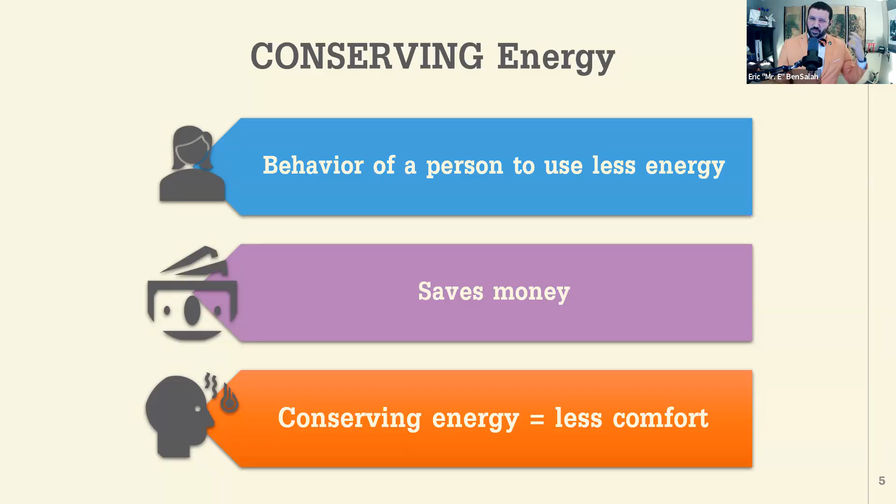For an example, and yes, this is my dog Waffles. I use my dogs when I teach a lot to help explain things, but Waffles is exhibiting an energy conservation behavior here. She's wearing a sweater instead of having the heat turned up by the thermostat. So yes, the air around her has not necessarily gotten warmer, but her radiating heat from her body has reduced because now she's warmed up. I think we all kind of know about the whole dressing up warm instead of turning the heat up, but that is a conservation behavior.

Turning off the lights when not in use or not in the room, turning off the water while brushing your teeth, taking a cold shower. All these things are behaviors that we do to reduce our energy usage.

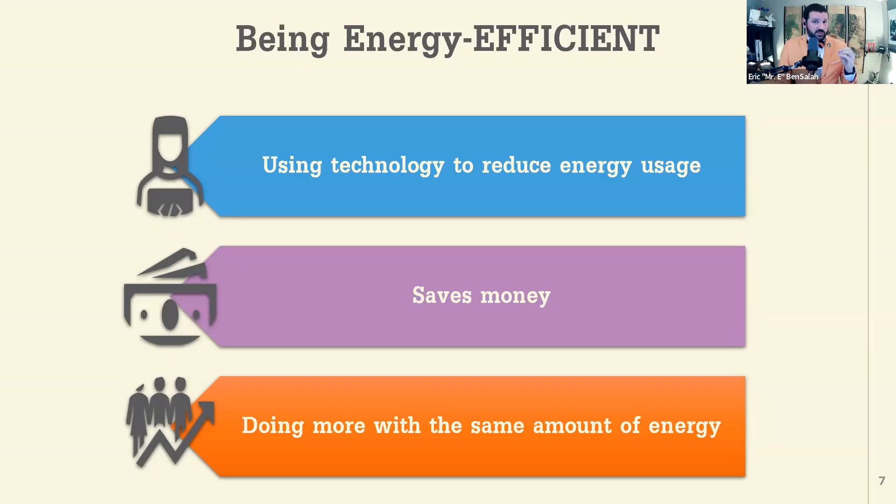On the other side of this, being energy efficient is when we are using a technology to reduce our energy usage. So we ask for some help from a technological standpoint. Again, we're reducing our energy usage, so we reduce the amount of money we have to pay. But because we're using a technology and being more efficient in terms of energy transfer, we can still do more with the same amount of energy.

The best example of this is LED light bulbs. I think we all understand them at this point, but LED light bulbs are a wonderful example of, first of all, light bulbs have to convert electrical energy to radiant energy. LEDs convert 90 to 95% of the electrical energy into radiant energy. Those old incandescent light bulbs only convert 10% into radiant energy. The rest of it is heat, which I don't think we buy light bulbs to heat our houses, but that is an example of energy efficient technology.

Smart technology like smart bulbs, plugs, outlets, power strips, even a smart thermostat or a programmable thermostat, those are all energy efficient ways to reduce our energy usage. And they don't always have to be technologically advanced. A low flow shower head is also an energy efficient technology to reduce the flow of water, which would also reduce how much water you're wasting, as well as how much water you have to heat to take a shower.

One last one I didn't have here as an example, but it's one I tell students about a lot: if you have an attached garage in adverse weather conditions, whether it's really cold or really hot, leaving your home through the garage is actually the most energy efficient way to do so.

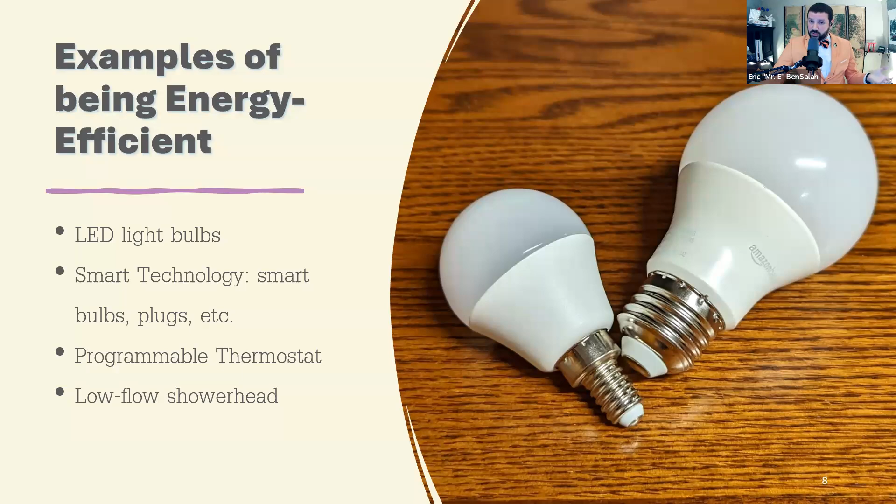Of course, I don't think you have to necessarily be one way or the other, but we can be energy conscious. My house is full of LED light bulbs and smart technology, but we still turn off things if we don't need them. No need to waste the energy. Smart technology can kind of help us reduce unnecessary energy usage as well. Especially if you leave the house and forget to turn something off, you have the ability to do so from anywhere pretty much in the country.

So what I like to think about when it comes to energy efficiency and conservation is thinking about the science behind all of it. I'm going to take you back real quick to sixth grade science class about the three methods of heat transfer. And I promise there's a point to this: conduction, convection, and radiation.

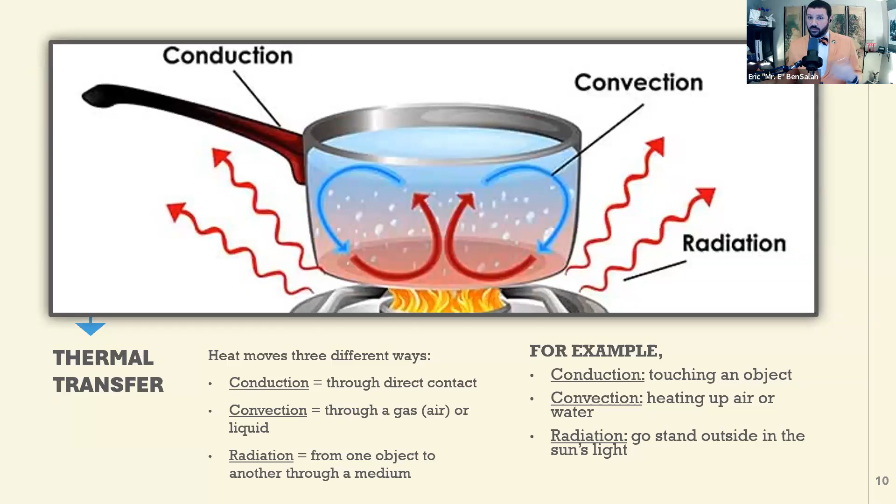Conduction, heat transfer or thermal transfer through direct contact. Convection through gas or a liquid. And radiation from one object to another through a medium. I bring this up because when we're looking at trying to stay comfortable, especially in the wintertime, this is paramount in understanding how this operates.

You can use window coverings, blinds or curtains or both, to change the temperature of the surface to some degree, so the temperature in the room and the temperature of the curtain are a little bit closer to each other than they would be to a window, because hot's going to go to cold all the time. If you have your couch set up by the window all the time, you're going to most likely be more cold than you normally would. So just alter things, maybe put the couch toward the interior of the home and the TV that generates heat by itself by the windows. Little things like that don't cost any money. Yeah, it changes the look of your room a little bit, but it's a way to better understand what makes us uncomfortable and what can lead us to changing the thermostat, costing us more money.

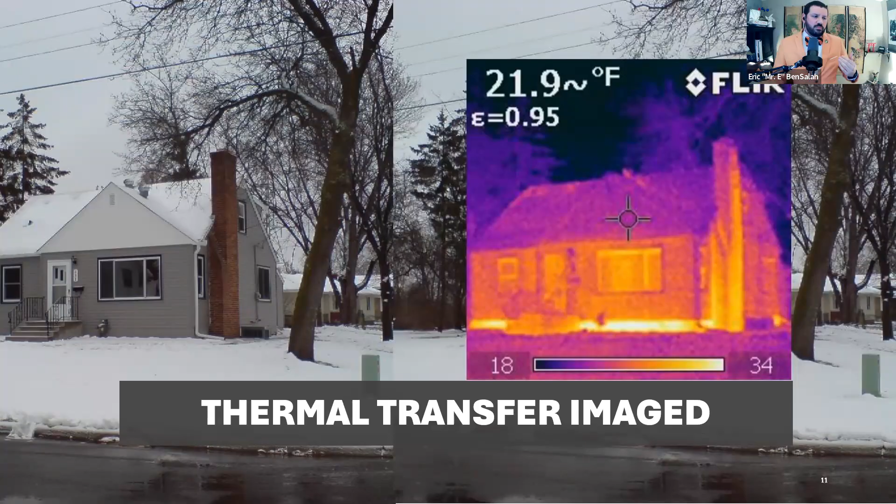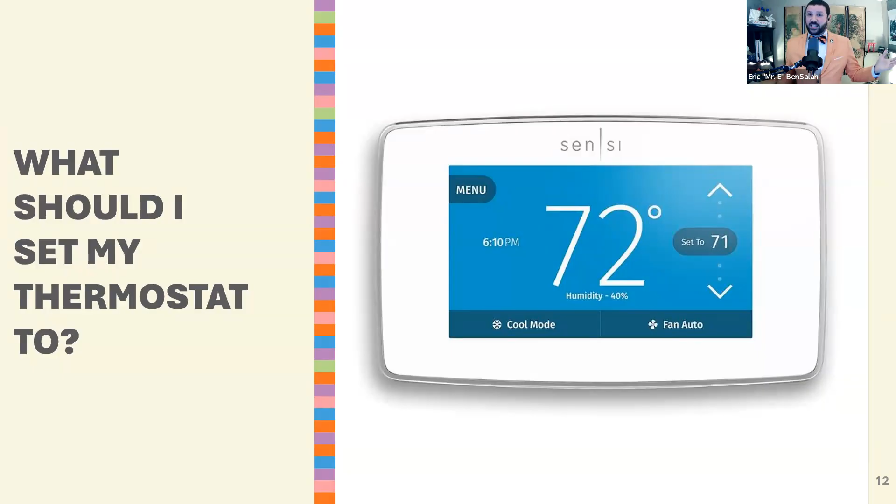So with that in mind, the number one question I get: what should I set my thermostat to? Now the Department of Energy for a long time said, in the summertime, which we're getting close to, you should set it to 78. My wife knows that if we set that to 78 in this house, we're sweating. That is way too hot. Now yes, that's less energy, I can't disagree with that. But I generally start here: there is no recommended temperature setting.

The main reason I don't recommend a temperature setting is because 72 degrees in your house will not be the same as 72 degrees in my house. It will not feel the same, not even close. Even homes that are the same model next to each other, we're not the same type of people, we don't have the same tendencies. Maybe there's more people living there, but it won't cost the same. So this is a very important piece to me because I could give you a recommended temperature setting, but I could either help you out or I could cost you more money.

So what I usually break it down to for customers is this: when it comes to your thermostat, heating and cooling your home, depending on your setup, whether you have gas heat or all electric, every degree you change your thermostat can increase or decrease your usage anywhere from as little as 1% per degree to as much as 5% per degree.

For example, in the summertime coming up, what I'll do when I go to bed is set the air conditioner down to 70. Keeps the house nice and cool, the sun's down, it's the coolest part of the day, the evening. And when I wake up, I jump the thermostat up to 73, maybe 74. So there's a little bit of time there, it saves some energy, and the house still holds on to that coolness. Eventually, once it warms up, the air conditioner starts turning back on.

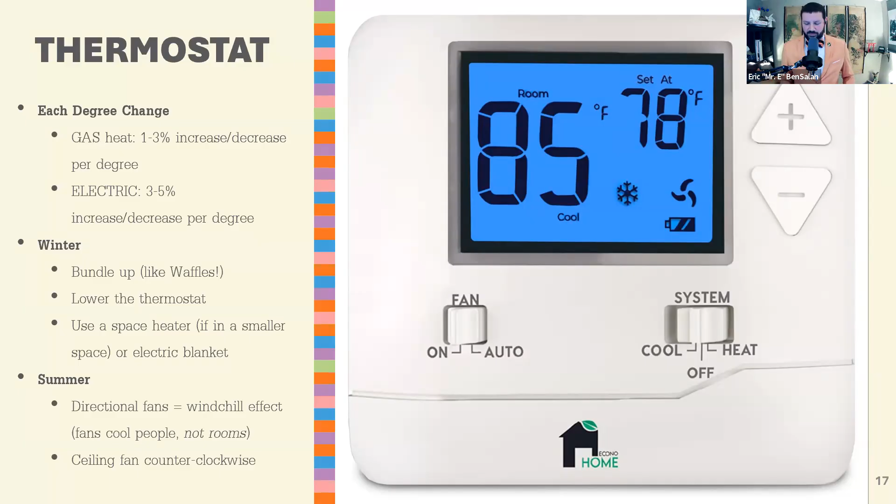And last part for our crash course here, the average breakdown. Obviously it depends on weather and climate conditions and lifestyle, but generally speaking, 50 to 60% of your OPPD bill is going to be heating and cooling your house. If you have a natural gas furnace, it's probably going to be a little less than that during the winter months. But generally speaking, that's the bulk of where your energy usage is coming from, is from making your house a specific temperature. If you have all electric, that number is going to be even a little higher.

Because now you have to also consider water heating is included in that. Water heating was always going to add probably about 20% to the amount of your bill.

At least in my home, we cook a lot, so the kitchen side of things is about 20% of our OPPD bill. That's just using refrigerator, freezer, coffee pot, toaster oven, stove - cooking food, essentially.

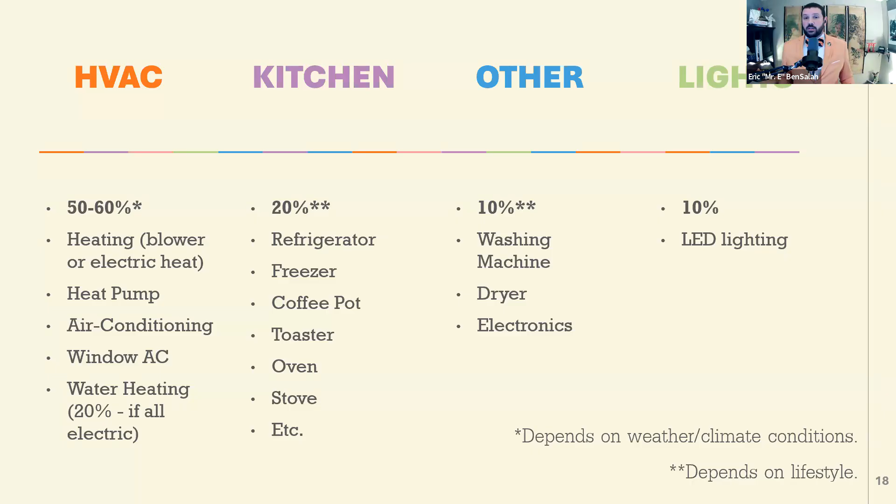From there, we don't have kids, so we don't have a ton of laundry to do, but washing machine, dryer, and electronics kind of occupy about 10%, maybe 15% from time to time. Lighting is probably even less than that 10%, especially with all LEDs in the house, and they're only on where we need them to be. LEDs just really don't use a lot of energy. So this is a rough estimate about how much of your OPPD bill is going toward these specific things that use electricity in the home.

All righty, with all of that in our back pocket, we're going to jump into some utility definitions, because we're in a small scale, and now we're going to pull back a little bit before we go back inside.

So these are going to be the four or five main terms that I'll use going forward to explain the rest of the presentation here. Load - that's the term we use that basically means the electricity that customers are using, the electricity that customers are taking off the grid, whether it's residential, commercial, small business, streetlights, anything that uses electricity. That's load to us, period. Or otherwise we can call that energy usage at a small scale, but we call it load.

Now, the other side of that, in between on the grid, is where the load is coming from, where the load is able to pull from - the generation side of things. That's electricity generated from power plants. For OPPD, we have wind, solar, coal, and natural gas. It generates the electricity, goes to the grid, customers take it off - we call that load. What goes into the grid is called generation.

Now, as much as we would love it to be really consistent, it's just not the way it is, especially summertime between 3 and 7 p.m. Everybody's coming home from school or coming home from work, turning the air conditioner down. That is what we would call a peak - a peak in the energy usage, a little jump in the energy usage.

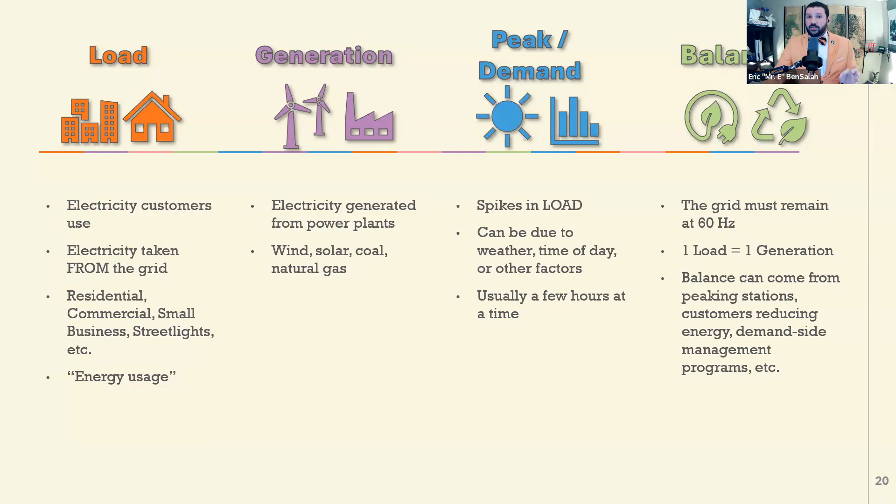So now that we have that information, here's our quick electricity 101 of how electricity gets from the power plant to your home. First off, obviously, it starts off with generation. Again, OPPD has wind, solar, natural gas, and coal. It depends on the day, depends on the weather, of what percentage is going to be generated from each one. Just kind of depends on everything that's going on.

Once that's generated, it has to go on transmission lines, but before it does that, it actually has to start through a substation with transformers that boost the voltage. You can kind of think about it like before you get to the interstate, you don't just go from a side street to the interstate. You have to get on the on-ramps and get your speed boosted up to get onto the interstate. So we use that substation to boost the voltage of electricity for it to travel on transmission lines.

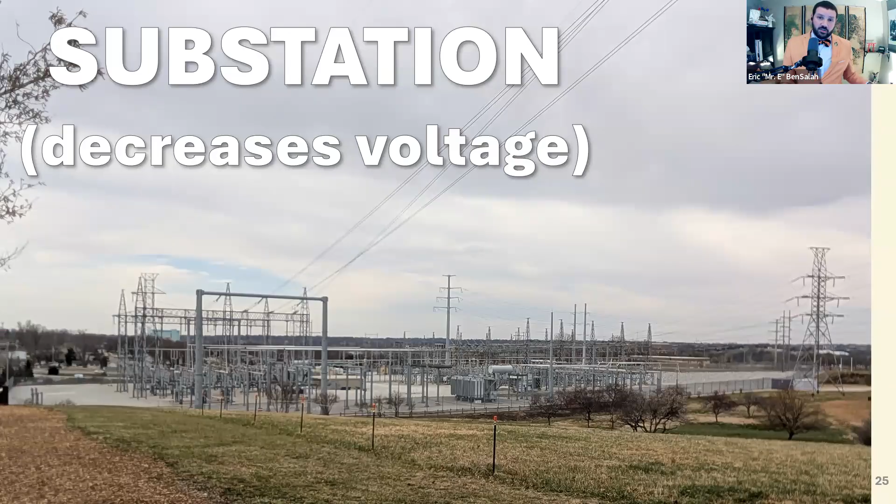So the off-ramp of our electricity interstate is another substation with transformers that decrease the voltage. So they lower that. You can kind of see right in the top middle of the picture, those are transmission lines coming in to that substation at our arboretum, and they'll lower the voltage, and then the electricity will leave the substation on distribution lines. And these distribution lines literally do just that. They distribute electricity to the surrounding neighborhoods, businesses, you name it.

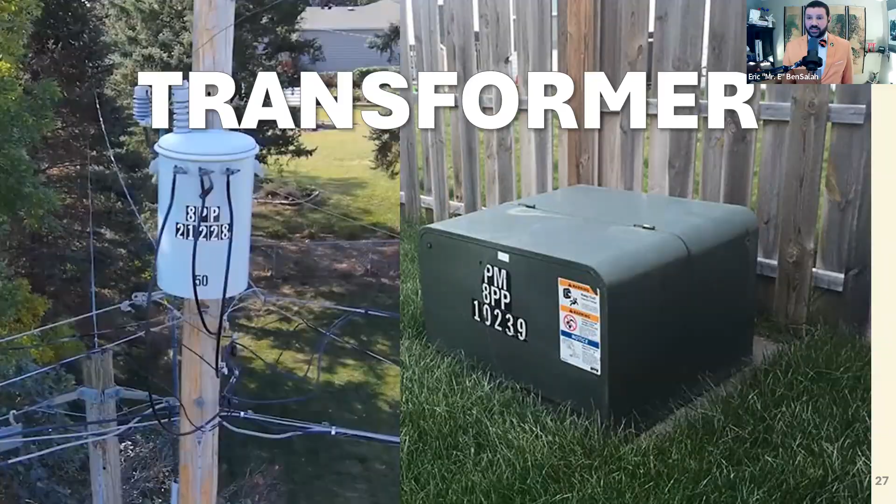The size of that substation is going to depend on what's around it. So there's that one more transformer. It's going to lower the voltage one more time, because now it's at its final destination. It's going to take that service line, whether it's above ground or below ground, and it's going to add electricity to the home. So that's how we get electricity to the home.

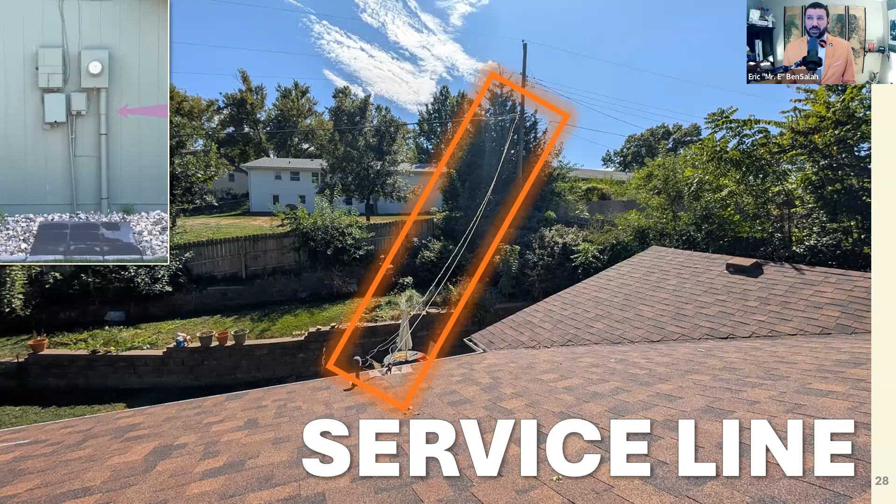Now you can imagine that's just one house, and that's a lot of power lines. That's a lot of infrastructure. And we have a little over 400,000 customers that use electricity. So we have to have a way to sometimes balance when those peak load moments happen.

So let's get into the demand side management programs here. This part of the definition area that we're going to be covering is right here in blue, the peak or the demand, those spikes in load, whether it's time of day, weather, other factors. Remember, couple hours at a time.

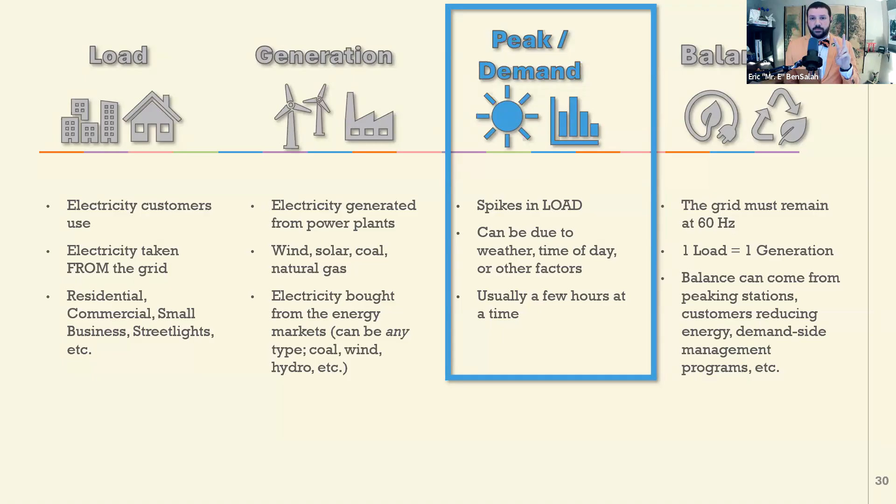So we have two main programs on our residential side for demand side management. That's going to be our smart thermostat program and our Cool Smart program. I'll start with the Smart Thermostat program overview.

So this is a program that you can sign up for if you have a smart thermostat, and you would get an initial bill credit of $100. And every year you participate in the program, you get $30. It runs roughly from May to October, but it's up to 15 events, which essentially would be 15 days, per year. So it's not literally every day from May all the way through October. It would be 15 select dates throughout the year.

And the time frame that it could occur in is going to be between 12 and 9 p.m., and it's usually only for about 4 hours. So it could be 12 to 4, it could be 1 to 5, something to that effect. There is an opt-out option through the Smart Thermostat app that you have for your smart thermostat, and this is also where you would enroll in OPPD's program here.

I have all the brands listed there, but for specifics of which model, some of the really older ones, whether it's Ecobee, Sensi, or Honeywell, whatever it might be, may not qualify. But on our website, we have a full list of every model under each brand that qualifies to participate in the program.

Now, the way this program works is we kind of start off with, okay, we see that our peak is coming, and that's going to happen from our energy forecasters and load predictors that are saying, oh, hey, we have a really hot day coming.

We predict that we're going to have a big spike around this time, so we're going to run an event. What'll happen is the thermostat, say your setting is 74, your thermostat is set at 74, an event gets started.

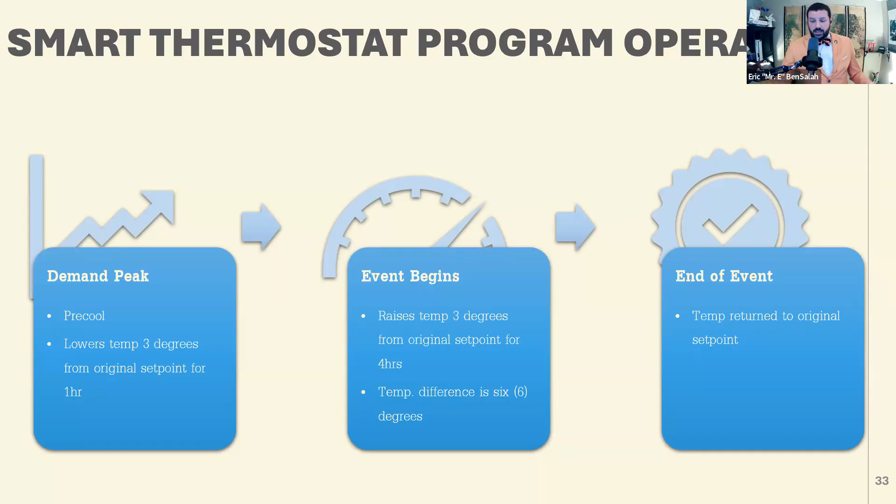That's it. The Cool Smart program operates somewhat similar, but it is different because it's a physical device. Participating in this program, signing up, you get a $30 bill credit. Every year you participate, you get a $20 bill credit. This one only runs between June and September and only up to 12 events per year.

And I didn't mention this about Smart Thermostat, but it's the same thing - it's only going to be weekdays and never holidays. For the Cool Smart program, it only runs from 3 p.m. to 7 p.m., and you can opt out of as many as 5 events. If you feel like, for example, you have family coming over and just can't run it, you don't want this program running during that time - that's totally fine.

The eligibility for this, however, requires that you must own a single family home, because there is a free outdoor device that gets installed on your air conditioner. It's a literal device, about the size of a shoebox, and it gets wired into your air conditioner. You also cannot be enrolled in the Smart Thermostat program.

The Cool Smart program operates by a signal being sent from a radio antenna, a radio tower, out to the customers that are participating to actually operate this. I'll talk about how it operates in just a moment, but I want to bring this up.

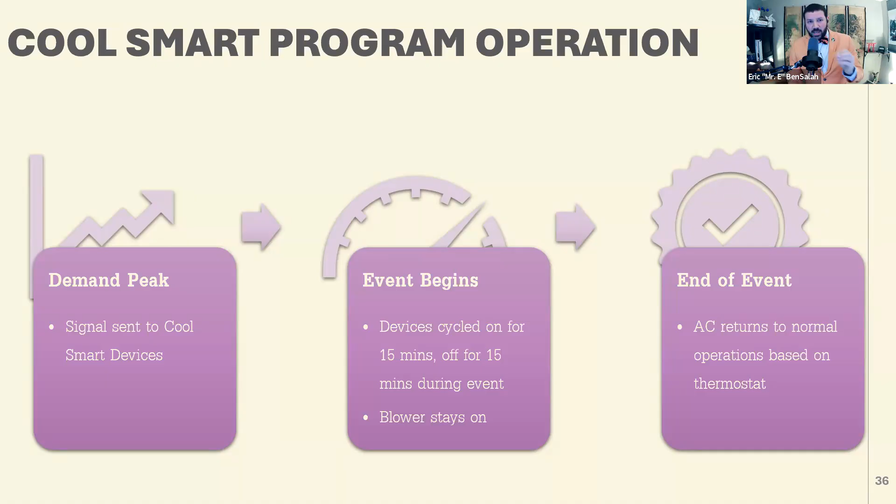Now, the impact of these programs, we can actually show, at least in terms of some numbers here. When I say megawatts, 1 megawatt is 1,000 kilowatts, roughly about the amount of energy a home uses in a month. With our smart thermostat program, year over year, we've seen an increase in the amount of megawatts

that we've been able to reduce from the grid during those demand moments. With Cool Smart, it kind of leveled off and dropped a little bit, but that drop also coincided with smart thermostat going up, because we did have customers say, hey, I have a smart thermostat, I'd rather do it that way. So we'll participate that way.

And then just wanted to throw this in there. I talked to the product manager of our demand side management programs, and he was talking to me about the C&I, commercial and industrial curtailment. It gives them an option of being able to actually curtail their usage, which also contributes to that demand side management. So there is a commercial side of things of being able to reduce energy usage as well.

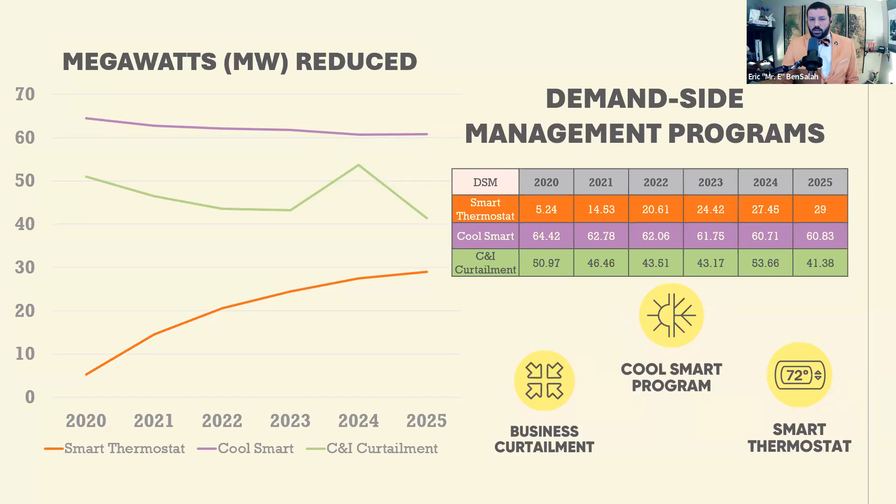Now, I kind of touched on some of the benefits for the customer in this situation. Anytime that you're not using energy, reduced utility bills. But additionally, when you have less energy use, you have less of a carbon footprint. Bottom line. I'll get to a little bit more about the carbon footprint in our final segment, the why segment here, but also the financial incentives involved in participating in the programs, the demand side management programs, the bill credits for signing up, and then obviously the bill credits for participating each year.

We do have energy efficiency rebates, things like that. I'll show you where to find those at the end of the presentation.

But to really hammer home all of this stuff is kind of one of my favorite areas to talk about, because I had this wise fourth grader ask me, like 5 years ago, if we're in the business of selling electricity to people, why would I be there to tell them how to use less? To him, it didn't make any sense. And it was a brilliant question, because we think about it. Everywhere we go to shop or to buy something, no one's going, please don't buy that much. Don't just put that back. You don't need all that. They're trying to get you to buy as much as possible. And here I am going, let me help you to use less.

There's very specific reasons for this. Now, there are many reasons, but these are the 4 main ones that I like to talk about with people. So grid balance is a part of this, balancing how much electricity we make or we generate versus how much is used. So we got the generation versus load here. It's easy, and it makes it easier to forecast and maintain sustainability and reliability on the grid if we're all conserving energy or being energy efficient when we can, or doing both. That makes the energy forecaster's job a lot easier. It makes the grid being able to be a little bit more sustainable and stable and reliable a lot easier.

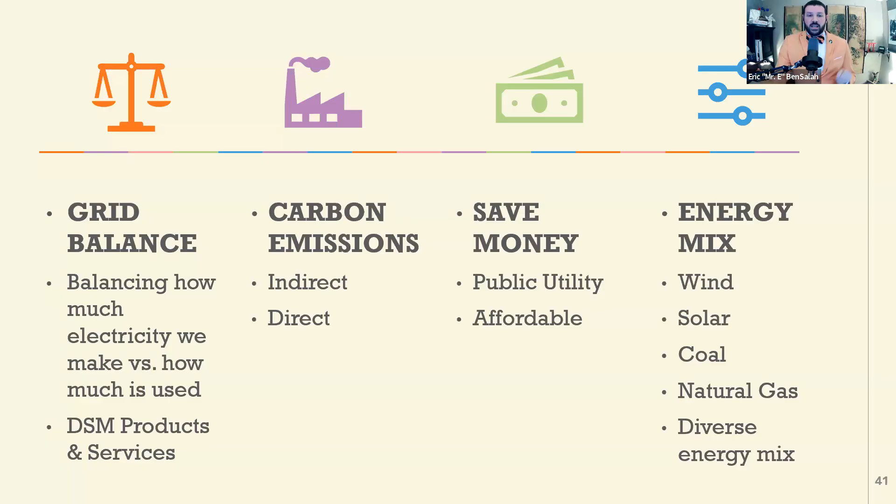The last piece to this is the Southwest Power Pool. If you don't know, OPPD is part of the Southwest Power Pool, which was just expanded from 14 states to 16 states on April 1st. That's not a joke. So any state in that yellow area is actually all interconnected with each other so that we can help maintain reliability on the grid.

This is a really big reason why we don't have rolling blackouts. We had rolling blackouts one time, during that wild polar vortex in February of 2021 - it was the only time we've ever had to have them. Being a part of this Southwest Power Pool has been a tremendous help in maintaining reliability on the grid, as well as sustainability, being able to work together as a team.

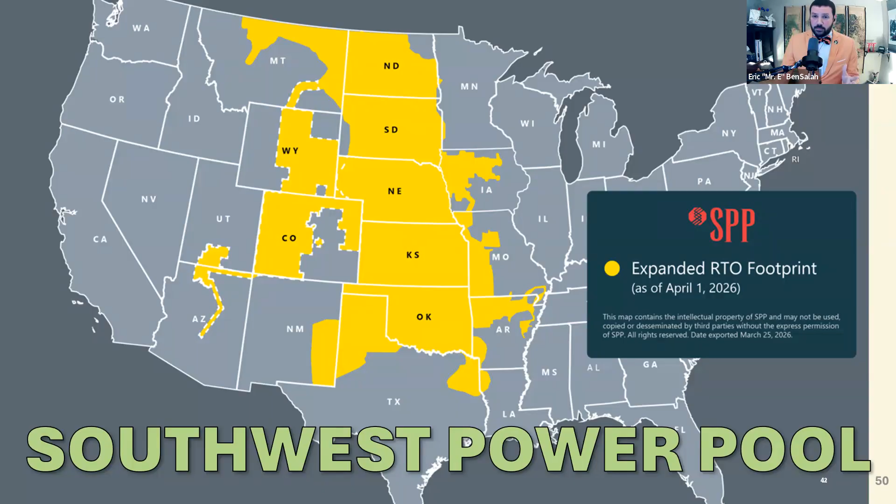So to close this segment out, I think about it this way: we get extreme weather, whether that's severe cold from a polar vortex or extreme heat, and it increases energy needs, whether that's just regular load going up or even the peak going up.

But if we get customers to be a little bit more energy efficient, energy conscious, and say, for example, here, reduces their usage by 5 kilowatts - that's not that much, basically a space heater running on high for about 2.5 hours - that reduces their load, 5 kilowatts, no big deal for one house. But what if we could get 10,000 houses to do that, or even more?

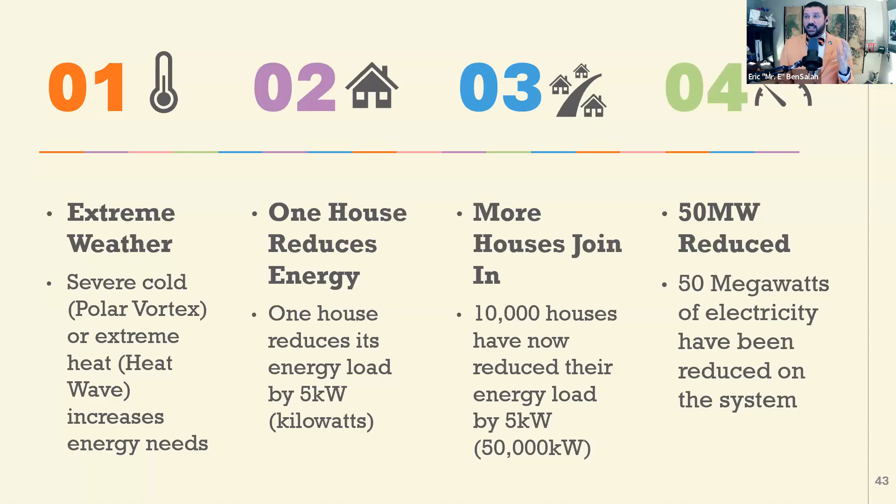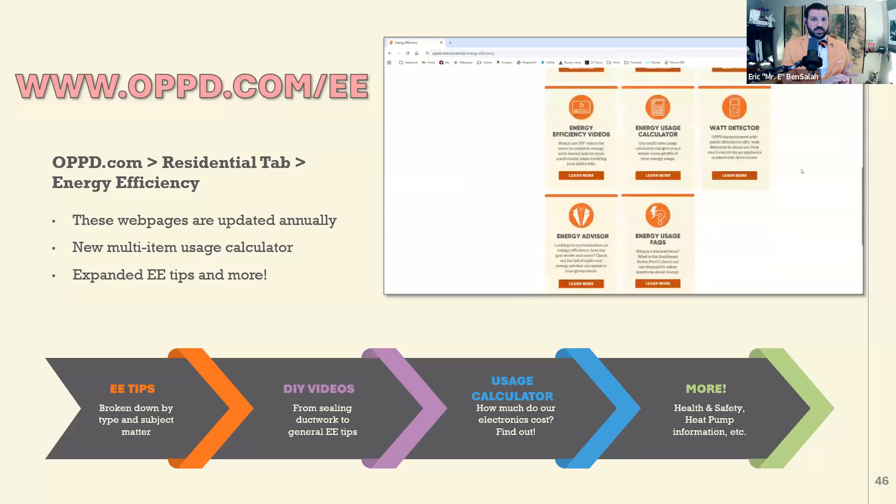All right, I'll close out with some resources here. OPPD.com/EE stands for energy efficiency. That's going to be your hub for anything energy efficiency, tips, and do-it-yourself videos. There's a brand new usage calculator we just created that can help you do a profile of your home. It breaks it down by different rooms and types, like the kitchen, heating and cooling, and electronics, so you can see a rough estimate of what your monthly bill might look like.

On top of that, if you go to youtube.com/OmahaPublicPowerDistrict, we have a bunch of playlists. There's an Electricity 101 playlist with 12 episodes, going more in depth than what I did earlier, covering electricity from the power plant to the home, how we restore power, how we balance the grid, energy efficiency, and more. There are also some webinars, so if you want to hear me go in depth into other concepts like insulation and smart technology, the webinars are a good place for that.

And as promised, our residential products, services, and rebates are at OPPD.com, under the residential tab under products and services — save money, save energy. We have all sorts of rebates there. The DIY energy assessment is a new program, and it sold out really quickly. We piloted that program and it sold out almost immediately, I think within maybe a week, so we're hoping that will come back soon. It's basically doing an energy audit yourself — you don't get to do the blower door testing, but you get to take thermal images of your home and get a full energy report. Hopefully that'll come back soon. But all of our rebates, programs, and products you can engage with are in that segment.